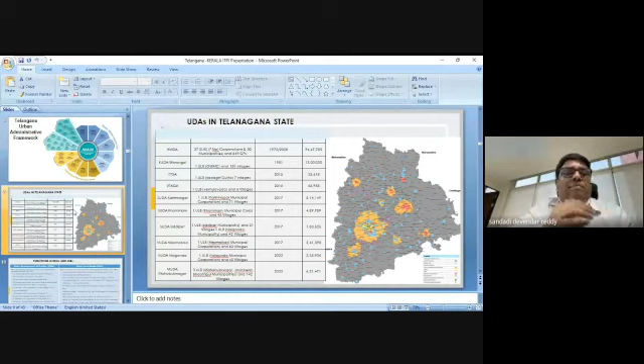So what is the relation between Urban Development Authorities and ULBs, how are functions shared between them? The main function of Urban Development Authorities is preparation of a master plan—it's a planning agency. Whereas urban local bodies are more like implementing agencies. Whatever master plan is prepared by the Urban Development Authorities is implemented in the urban local bodies. So there is overlap of functions between both UDAs and municipalities, because though urban planning is done by the urban development authorities, the actual implementation is done partly by the urban development authority and partly by the ULBs. So there is always conflict between these two bodies whenever it relates to urban planning.

Strictly speaking, in the preparation of the master plan, the existing Urban Development Authority Act does not give any statutory role to urban local bodies in plan preparation. Whenever the Urban Development Authority notifies a master plan, it's not mandatory that they take the council resolution or municipality resolution. Fundamentally, this is against the 74th Constitutional Amendment Act. So either the Urban Development Authority Act, which is in force, has to be amended, or we have to bring back the Metropolitan Planning Committee or District Planning Committee, which were constituted for consultation with various stakeholders.

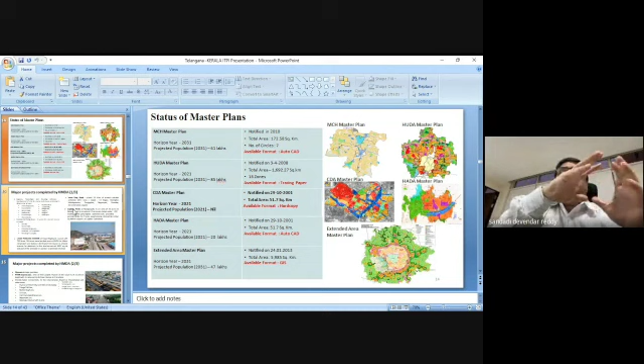So we have 5 different sets of master plans actually prepared in different periods. In fact, this is one of the major issues which we are now facing with these plans. And now recently we have decided that we will go with a new comprehensive single master plan.

There is the Municipal Corporation of Hyderabad, meaning the core Hyderabad city, for which the master plan was prepared in 2010. Then we have surrounding areas, some 9 or 10 municipalities, for which the master plan was prepared in 2008. And for the IT zone and other areas, we have a special plan, which was prepared in 2001. And the Hyderabad Airport Development Authority has a separate master plan for the airport and surrounding areas, which was approved in 2008.

And finally, when we extended the metropolitan area in 2008, for the extended area we prepared and sanctioned the master plan in 2013. So we have master plans in force in almost all areas, but the majority of the master plans are now 15 to 20 years old, so they are now due for revision.

Since we have to revise these master plans, we have decided that for the entire 7,257 square kilometers of area, we will have one single master plan. This process is going to be started in 2024. For these master plans, covering 30 municipalities and 7 corporations, the consultation was minimal - almost negligible for the smaller municipalities, except for Greater Hyderabad Municipal Corporation, which had a series of consultations with corporation officials and elected representatives. As far as the Gram Panchayats are concerned, I don't think we had any formal interaction with them or their elected representatives.

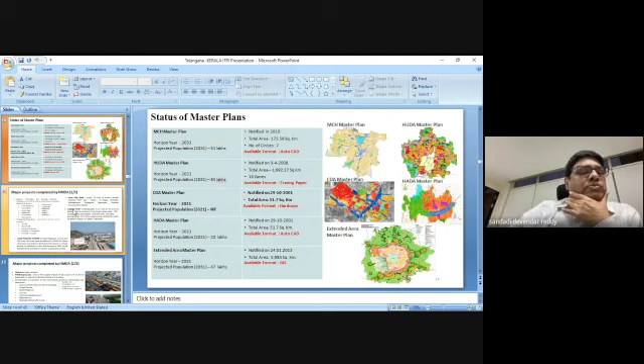So straight away, next I'll go to the various activities of HMDA. As said, HMDA is basically a planning agency. Hyderabad Metropolitan Development Authority is intended to prepare a master plan and see that planned development happens in that area. Implementation is done through developmental control regulations like issue of building permissions and layouts, that's one part.

The other part is that they also do a lot of projects. HMDA develops a lot of townships and housing schemes. These schemes are on lands where government has given land to HMDA for development of these townships and housing complexes. They also build certain commercial complexes for revenue generation or fixed revenue for the authority.

In recent times, we have also started land pooling schemes. We already have 3 schemes completed, and another 5 schemes are now under progress. Even though we are doing it at a slightly slower pace, we are trying to gear up the land pooling schemes and see that they are implemented on a much larger scale.

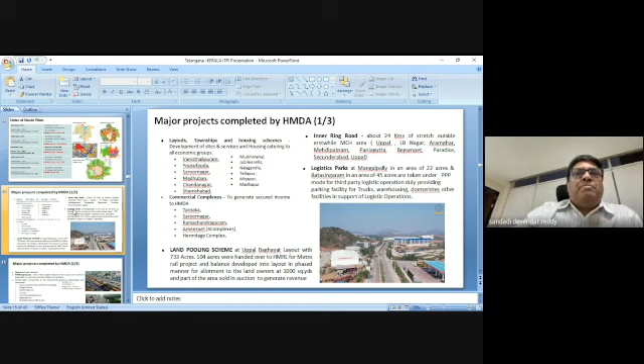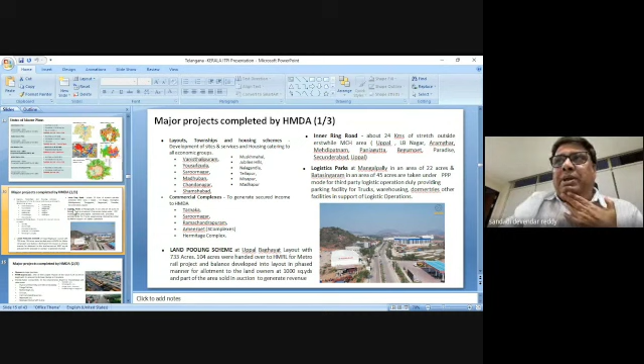Regarding the inner ring road, whatever ring roads we propose in the master plan have also been implemented by the Hyderabad Metropolitan Development Authority. They also develop logistic parks, whatever transport hubs we propose at the transit nodes. That was developed at two places, Mangalpally and Batasingaram. Both places are already in use now.

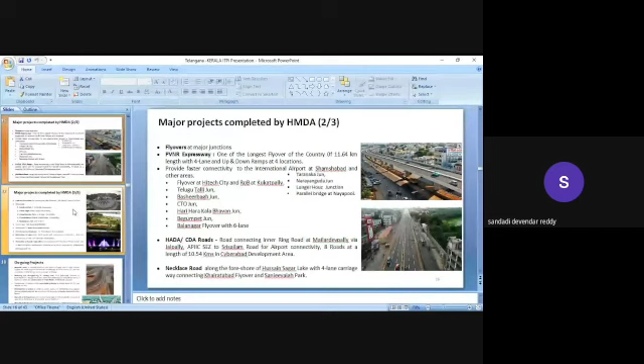Regarding traffic and transportation, HMDA has developed a lot of projects and flyovers. One of the big flyovers is the PVNR Expressway, PV Narasimha Rao Expressway. This is the longest flyover of the country, about 11.64 kilometers with 4 lanes. I think at that time it was the longest; now a few more flyovers have come longer than this one.

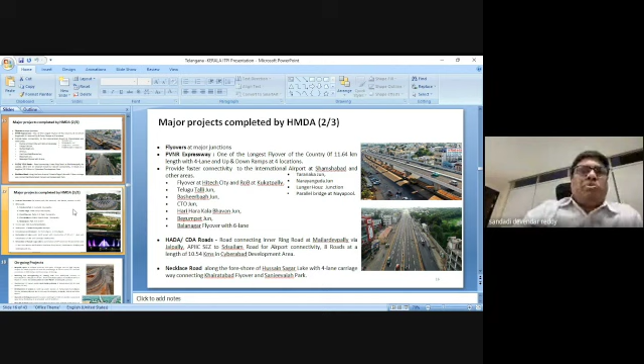At different places, they have also constructed various flyovers. And Hussain Sagar, around Necklace Road, the beautiful lake we have around that Necklace Road, was also developed as part of this.

The other thing HMDA does is greenery. As you know, Hyderabad has been rewarded as one of the best tree award winners. We got it from an international agency a few months back, last year, beating Paris and other cities. Parks and recreational facility creation is one of the major functions of HMDA. They do a lot of citywide greenery space development, and they also develop waterfront developments around the big lakes, with waterfront parks and recreational spaces.

Restoration of lakes is also one of the important tasks of HMDA. There were around 1,435 lakes in the Hyderabad Metropolitan Development Authority area. All these lakes have been mapped, and FTLs have been fixed, and conservation and restoration work of these lakes is under progress. Some of them have already been completed and some are under progress.

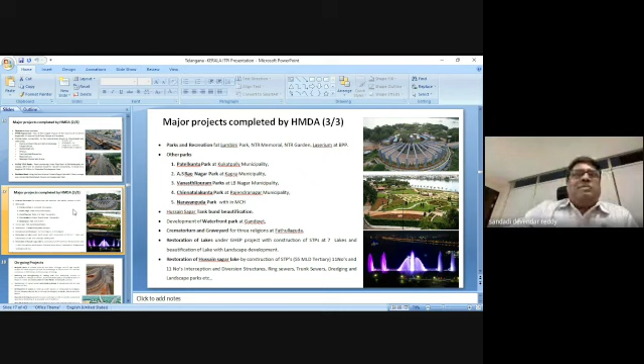These are the projects which have already been completed and ongoing projects. We have recently come up with a big layout cluster development at the outskirts of Hyderabad, close to the Outer Ring Road. When we auctioned that land, the maximum rate which came was very high, about 100 crores per acre. So 1 acre went for 100 crores. The potential of Hyderabad has been seen in that public auction conducted by the Hyderabad Metropolitan Development Authority.

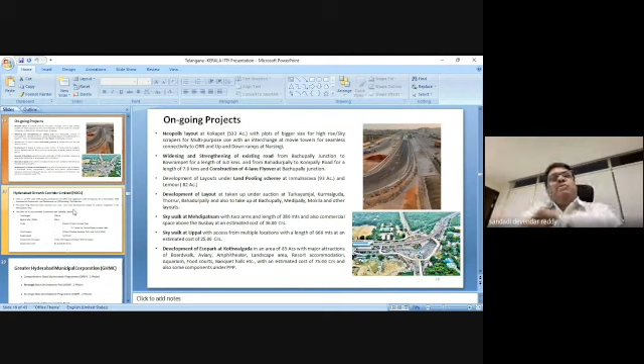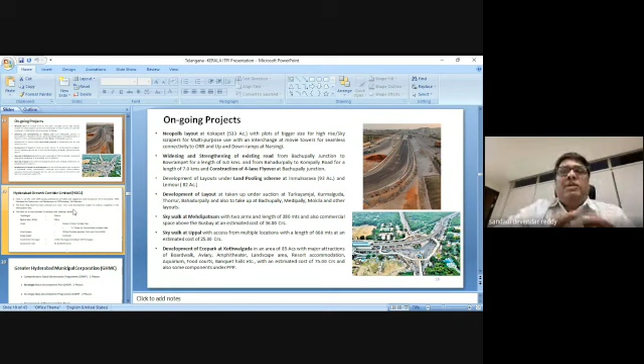HMDA is also developing a lot of skywalks, basically wherever they have metro stations, to connect these metro stations to the existing bus stations, auto stands, or railway stations. This is to have multimodal integration, connecting them with skywalks. Already 3-4 skywalks are under progress, and we are expecting to complete it by this year end. This will also increase accessibility to the metro stations, especially from the public transportation point of view.

There is an outer ring road which has been developed around Hyderabad. Whenever you land onto the airport, you see this beautiful outer ring road. It is about 158 kilometers in length, an 8-lane carriageway, with two additional service roads on both sides. We have 19 interchanges at different locations, and the design speed is around 120 kilometers per hour.

The beauty of this project is that it has been done under public-private partnership. This is one of the largest projects taken up under public-private partnership, developed by L&T. L&T was provided with certain land parcels which they took up for commercial development, and in lieu of this, the Hyderabad Growth Corridor Outer Ring Road has been developed. They have also been given power to levy the toll and other things.

So these are the HMDA works. Before getting into the TDR, I'll also mention a few projects taken up under Greater Hyderabad Municipal Corporation. Here we have what we call the strategic road development plan. Since it is a brownfield area where development has already come up, there is not much to do with the existing development. It's more about construction of flyovers, RUBs, and ROBs.

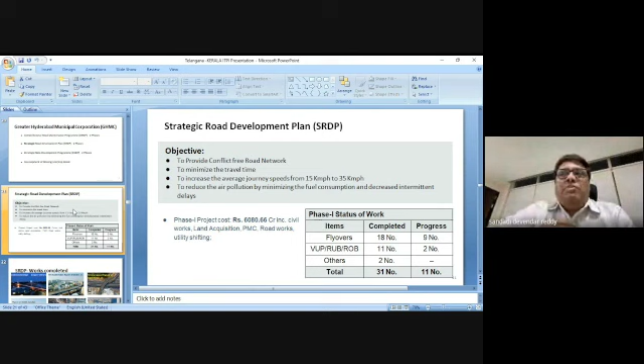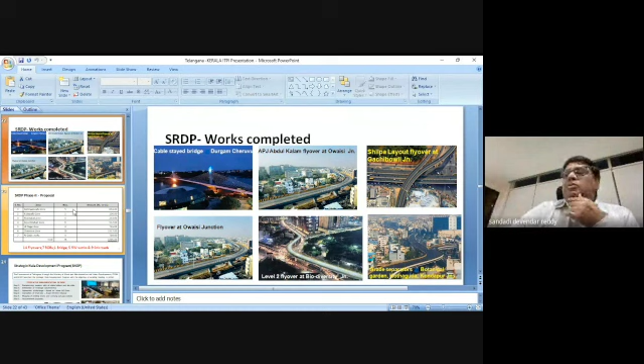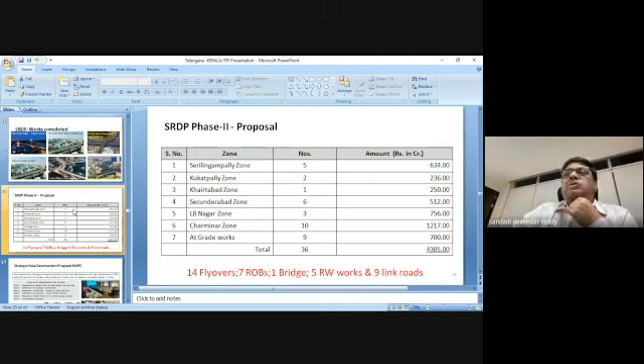There are about 31 flyovers that have been constructed, and all of these have been completed. In fact, these flyovers have made a lot of difference, especially in reducing traffic congestion in high density corridors. We have completed phase 1, and in phase 2, another 36 flyovers, RUBs, and ROBs are proposed with an outlay of 4,300 crores. This is going to start next year.

Then we have the strategic Nala development program. Hyderabad, whenever heavy rains come, experiences a lot of flooding, and many low-lying areas get inundated. For this, we had a program called the strategic Nala development program, in which we had a series of interactions with stakeholders, including local corporators, citizens, and welfare associations. Finally, we came up with a detailed plan for that.

There are 3 solutions which we have adopted here. One is increasing the drain capacity through widening of the nalas and other measures. The second solution is to bypass the drain alternatively wherever it is in a thickly built-up area where you cannot widen the drain or nala portion. With minimum land acquisition, we tried to bypass the drain using gravity, keeping in view the contour levels, making an alternative arrangement for the flow of water.

And the third thing, which is very important and which many cities could not do, is lake management. Many of these lakes located in urban areas were earlier irrigation lakes. As time went on and irrigation stopped, the irrigation department stopped maintaining these tanks, especially the sluice gates, which earlier used to be opened to release water downstream when needed. But over time, since these gates were not opened or maintained properly, they stopped functioning.

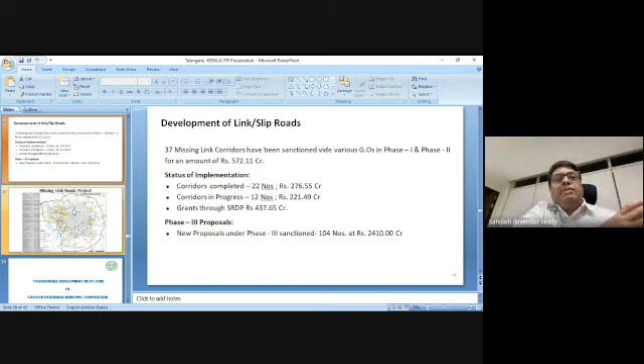So we have phase 1 and phase 2 amounting to 570 crores. As I said, building one flyover takes a minimum of 100 crores, so with 570 crores you would build only 5 flyovers. But with the same amount, I was able to develop around 37, 35 new link roads, ranging in length from 500 meters to around 1.5 to 2 kilometers.

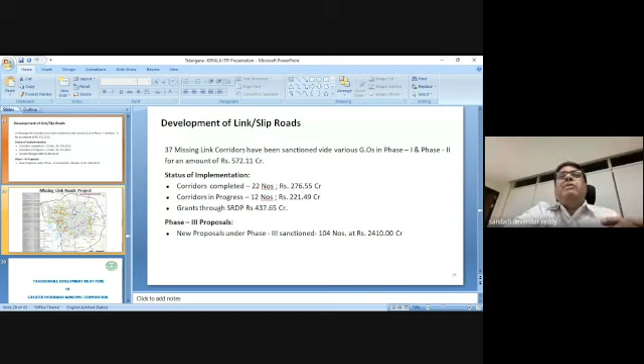In phase 3, we have identified the balance of 104 roads, for which we require around 2,400 crores. We are trying to get funding from various financial agencies. Once funding is tied up, we will take up these missing link road projects. This is basically about the location of these roads and the list of them.

So this is the end of the second part, where I've told you more about the developmental activities being taken up by Hyderabad Metropolitan Development Authority and the Greater Hyderabad Municipal Corporation. Before getting into the TDR, if you have any doubt or anything, please ask.

We have great appreciation for your achievements, your state's achievement in urban development and focused development happening here. We really congratulate you for your achievements and your career, which is enriched by such experiences. We are happy to know that.

As I said, the Urban Development Authority, in terms of Greater Hyderabad Municipal Corporation and HMDA, both do the work. It's not that HMDA develops everything; projects with wider influence or wider effect, like the metro rail or outer ring road, are taken up by HMDA. Simple construction of a flyover or anything else is done by the corporation.

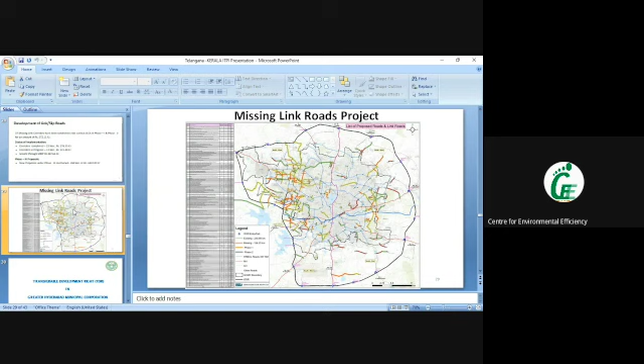I would like to hear something about the Unified Metropolitan Transport Authority. Is it also owned by HMDA? Yes, we have a unified metropolitan UMTA - it's a part of HMDA only, but it has been constituted a long time back. They supervised and coordinated the entire Comprehensive Mobility Plan for Hyderabad City.

But there are other things regarding UMTA - there is a transport fund which is supposed to be created under UMTA, wherein advertisement charges, police fines, and other development charges should also go to the transport fund. That has not happened. So though we have created UMTA under the umbrella of HMDA, the financial powers are not given to it - dedicated funds for UMTA is something we still have to do. That is missing in our case.

But we have a UMTA where the Chief Secretary generally chairs the meetings, while Secretariat functions are done by HMDA. And it's very effective - UMTA meetings resolve a lot of coordination issues, especially for big projects like Metro, which involve many other departments like Forest, R&B, and Building Department. The Chief Secretary convening the other department secretaries ensures they cannot skip it. That is a very good thing which has happened.

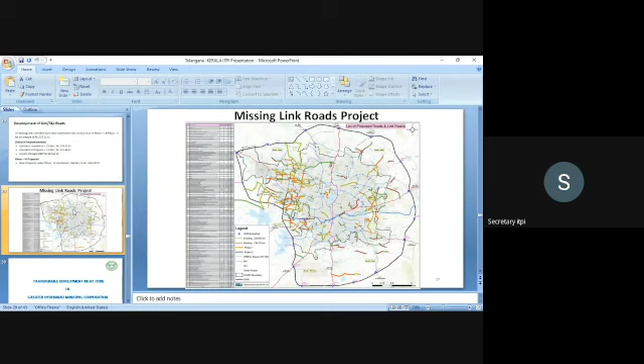DTCP is the overall state head. As far as urban development authorities are concerned, the Director of Town and Country Planning is an executive committee member in all the urban development authorities. So he participates in all the board meetings, and whatever decisions are taken by that authority, DTCP is part of the decision-making process. But in day-to-day administration, I don't think DTCP has got much role in these urban development authorities.

As far as ULBs are concerned, there are two types: ULBs which are part of urban development authority, and ULBs which are outside urban development authorities. For the ULBs outside UDA, the Director of Urban Development Planning prepares the master plan and gives technical guidance to the municipalities. But for ULBs which are in a UDA, the Urban Development Authority gives them the technical guidance.

But in our case, most of the manpower working in Urban Development Authorities are from the Directorate of Planning Department. They are on deputation to the Urban Development Authorities, both in Hyderabad, Warangal, and other municipalities. In fact, we have a town planning function working in municipalities and municipal corporations also, and those persons also belong to the town planning department, the Directorate of Town and Country Planning.